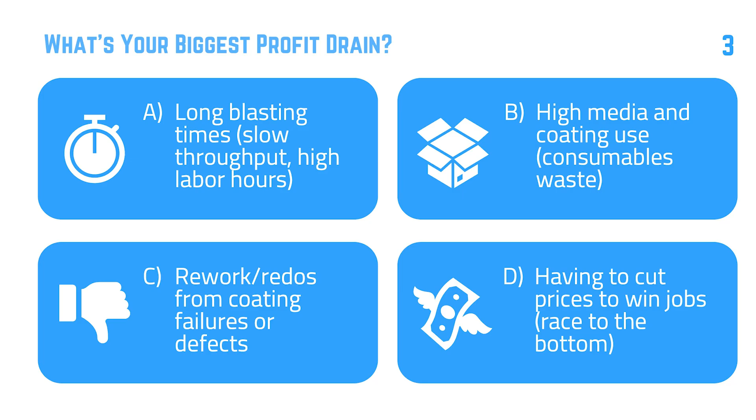Okay, so what we're going to cover today shouldn't take too long. What we're not going to talk about is fluid dynamics and material science, I promise. But we first have to explain what the particles do and why they're different, because knowing these things is important for you to be able to think through how you can take advantage of them in your particular business.

We all know surface finishing is not easy. It can be difficult to achieve exactly what you need on the first pass without rejects or unplanned work. And we'll cover how 10x abrasives can plug these profit leaks, and next is how you can leverage these properties to differentiate your business from your competition.

Our goal as a business is to help you elevate the position of your business and command a premium that, as Jacob just said, your customers will be happy to pay for. The most valuable part of this will be in what Jacob has to say specifically about how he's doing all of this. You may not do exactly what he's doing, but the goal is for you to get new ideas about what you can do to solve your problems and improve your business. And we'll leave time at the end to answer your questions.

So why is 10x superoxalloy abrasive unique? Well, it all happens in the mineral wool process, in the way that they formulate the material, what's in it, and in the way they process it.

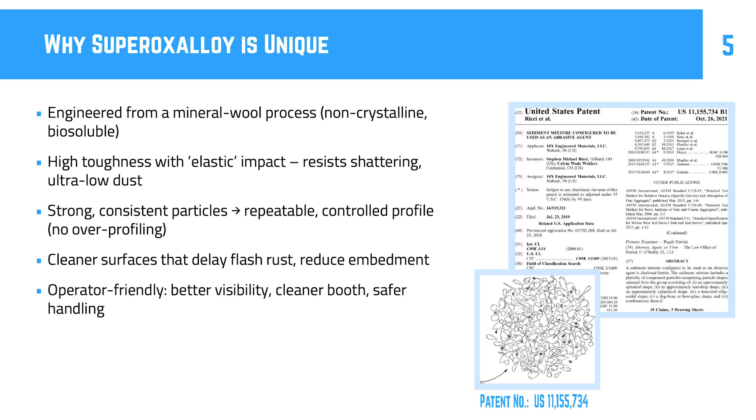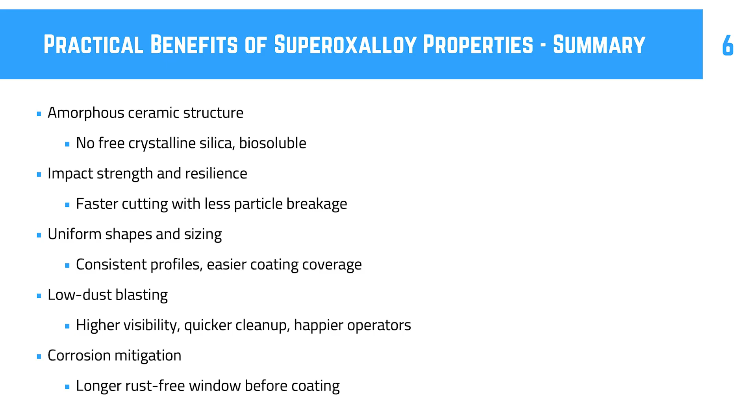So this is a summary of basically what I just said on the last slide. We wanted to have this on here for the people who watch the presentation after this live webinar.

So, plugging the profit leaks. Profit leaks are everywhere in surface preparation, just as they're everywhere in just about every business. The way it works is there's a lot of seemingly small things that add up and weigh down profitability. One nearly invisible leak in surface prep is excess abrasive consumption.

With any abrasive, you obviously want to use the least amount required for the job. Accomplishing this involves testing different equipment and operational settings, like pressure, nozzle size, abrasive metering, abrasive reclaim settings, among other things. But you'll find that with 10X, at the end of this you'll be using less media than other abrasives, sometimes dramatically less. You'll use less abrasive per pass, and then you'll be able to reuse it many times.

The next issue is coating usage and cost. This is often the result of an improper, over-profiled or inconsistently profiled surface, which has to be covered up by applying more coating. It has far-reaching effects for overall cost and throughput because it leads to defects and rework, longer cure times and energy costs, and unnecessary increases in overall cycle time.

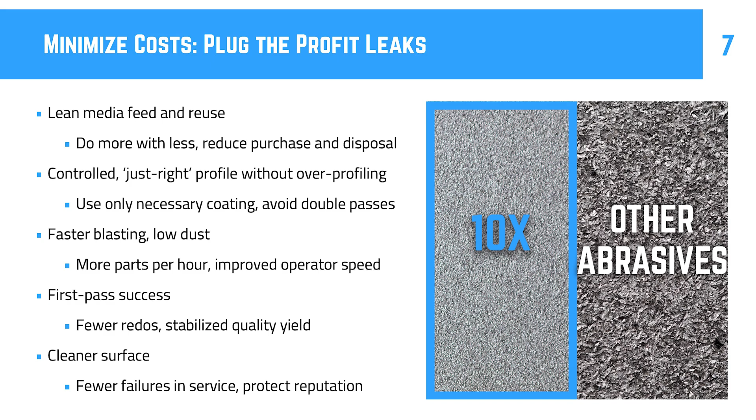And then finally, there's the premature field failures. They're critically important, but you only know about some of them. Many of them just create disappointed customers who don't come back, and you may never know why.

So some of the defects that you guys are all aware of and have seen before, but they are just so important, and you'll see a lot less of these if you use 10X abrasives.

Surface prep is involved in many of these defects: fish eyes, edge chipping, uneven films, and the nastiest of them all we just discussed: rejects, rework, and delays. So with a high first pass success rate, and it's all because of the properties that the 10X particles inherit from the mineral wool process.

And then talking about just to go over those two pictures real quick. So that first slide to me looks like embedment, which out of all the years I've been using 10X now, I've never once had an embedment issue. And then the slide to the right there, the orange peel, that can be from uneven film buildup.

But also what I've noticed is some of the harsher medias, maybe like coal slag, can actually leave that same looking defect and cause maybe not a performance issue, but definitely an aesthetic issue that your customer will not be happy with. Another thing I've not experienced yet with 10X.

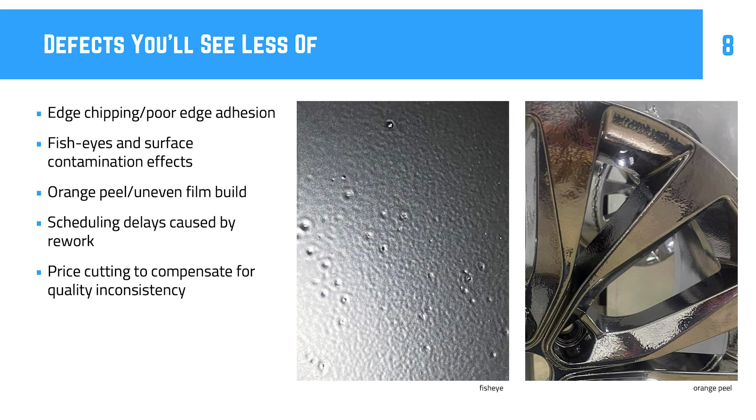And finally, everyone who's in business knows that improving profitability is not easy. It's a lot easier said than done, and it involves more than just cutting costs. We have to differentiate ourselves, and we have to find ways to provide extra value and give customers reasons to choose us and stay with us, and even pay a premium for the quality that they get.

When your customer says that XYZ company across town can do this for X dollars less, you need to be able to say, nope, they can't do this. Let me show you something.

And this means you have to document your value. You have to be ready to communicate it to your customers and to the market on a regular basis. That will change your position in the market. And this will help you get new customers. It'll sustain your repeat business. But probably as importantly as anything, it'll help you attract higher value customers and opportunities.

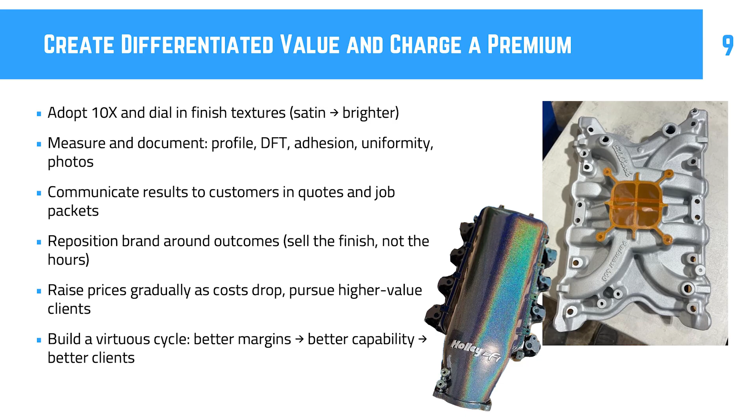And all of this can turn into an upward virtuous spiral. And 10X can be your secret weapon in all of this. It has been for Jacob, and he's here to tell you what embracing this technology has done for his business.

So, Jacob, we'd love it if you could just take it away and share how you're doing this, sort of as a reference for others, so that they can develop their own ideas on how they can do it in their business. Sure.

And then adhesion as well. I've noticed extreme improvements in adhesion. We have a lot of industrial customers. And again, I could talk for hours about this, but adhesion, depending on which way you're going with your business, if your customers are more industrial and do like ASTM D533 or 544, I can't remember the exact number, but if they do the mandrel test, we've noticed and seen across that there has been a significant improvement over what we used in the past. And over the years, that has allowed me to absorb a lot more customers that are industrial.

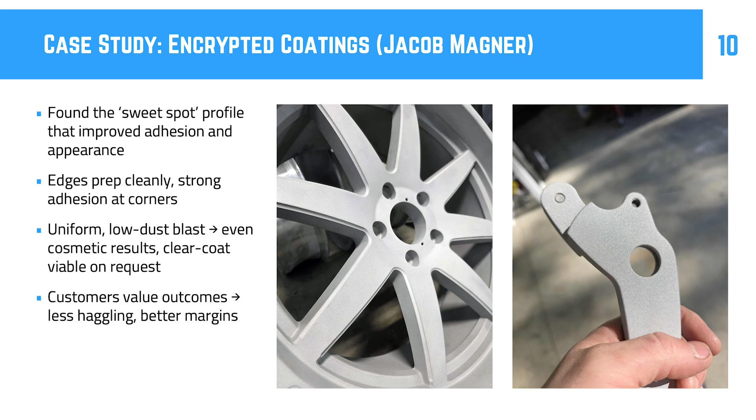It's pretty cool, and I attribute a lot of my success to the steps I take, maybe not looking at how much you're making, but more how good of a product you can come up with. That's what I attribute a lot of my success to. I don't want to ramble too long, but hopefully that helps a lot of people.

So you found us, I think, in 2020, maybe late 2020, and started late 2019. Okay, but definitely 2020 is when I think you blasted for the first time with 10X, and you were looking for something safer. I love it, because I think we actually connected, I wasn't CMO back then, but we ended up connecting first, and I was like, well, just get a bag and try it. This is how this happened.

I was just doing custom work, and it has ups and downs. So coming from running a tier one company, I wanted to figure out what we could do to fill those gaps and what would be more consistent.

I did find a customer, and they wanted to move forward, but they wanted to do all the testing, from salt spray on the actual coating, not adhesion, but they also wanted to do mandrel testing, and a couple other ASTM tests. Unfortunately, we failed using another media, I'm not going to say what media it was. That's what led me to go in my group and search what everybody else is using.

Back then I didn't know anything about 10x. It came up on the post, and I was like, alright, I'm going to give this a try. So we did, passed everything with flying colors, and that was my first large industrial customer. That led me to bring on an employee, my first employee, and he's still with us today. He's an awesome guy, Hunter, shout out.

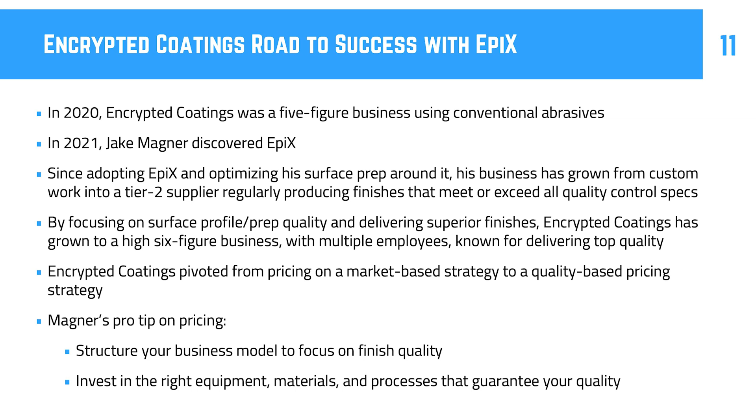Steve, the first question is actually for you. There was a question tagged, and the gentleman Don asked, do you have data on longevity compared to steel grit? Do you mind talking a little bit about that?

Yes, we don't have any of our own data on that. All I can do is share our customer experience. And as everyone knows, long-term data is kind of hard to collect. A lot of the problems occur years down the road if they occur. But we do know what happens initially, right at surface preparation, right after coating, and we covered that with the defects that occur.

We have customers that are not in the powder coating industry, but are more in shipbuilding, manufacturing, maintenance, who do know what happens with surfaces that have been coated after preparing them with EpiX. The boats come back, they blasted a few years ago, and they're in much better shape than they typically see. And they know that they had prepared that vessel with EpiX beforehand.